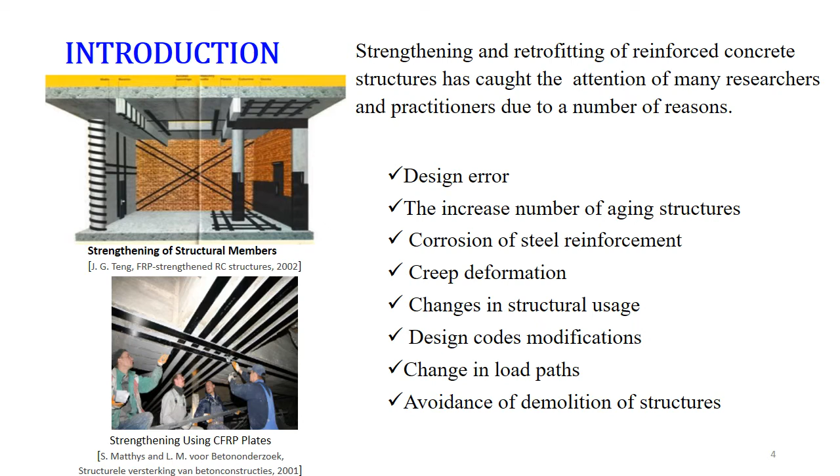Extensive research has been conducted in the last 3 decades to evaluate the performance of strengthening materials. Different strengthening techniques have been used to increase the axial, flexural, shear, and torsional strength and stiffness of structural members. One of the most widely used techniques is the use of steel and fiber reinforced polymer as externally bonded reinforcement. Steel kind of lost its popularity due to many reasons, because it is susceptible to corrosion and other shortcomings.

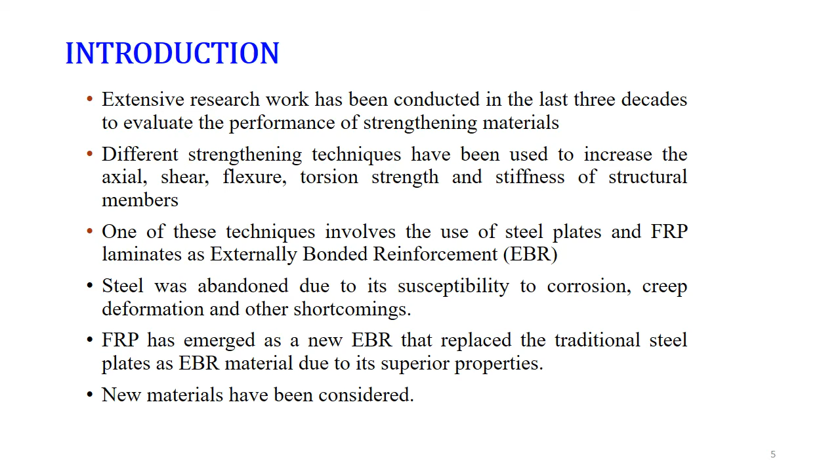FRP emerged as the most widely used external bonded reinforcement, due to many advantages it has, though it also has some few disadvantages.

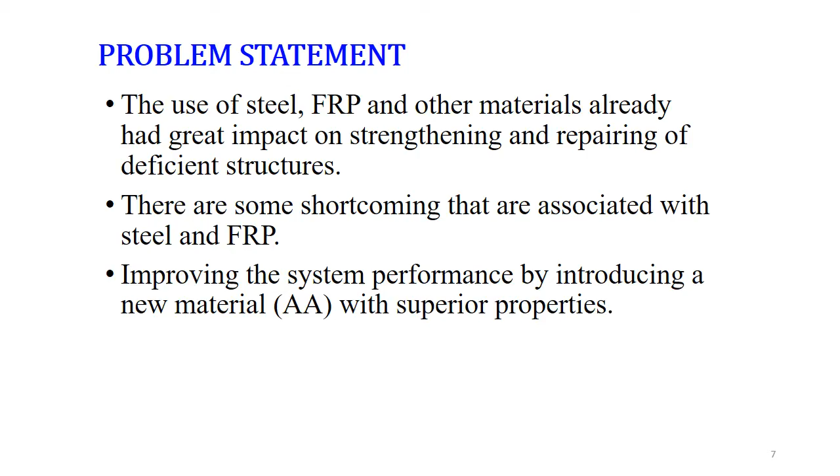Problem statement. The use of steel, FRP, and other materials already has a great impact on strengthening, repairing, and retrofitting of structures, though they have some shortcomings. What we are proposing here is using a new material, aluminum alloys, which has some advantages over the other two materials that have been used, steel and FRP.

If we look at steel, the disadvantages are susceptibility to corrosion and heavy weight. The advantage is it's ductile, and it has a lower cost. In between, it has flexibility and strength, but in the middle.

The CFRP, carbon fiber reinforced polymer: the advantage is that it doesn't corrode and it's lightweight. The disadvantage is that the failure is brittle, there is no ductility, it's a little bit costly, and it's inflexible, especially the plates. It's difficult to use plates in some situations, and one of its advantages is that it has high strength, higher than steel most of the time.

Aluminum, if you see, is greener. It has good resistance to corrosion, it's lightweight, has high ductility, and the cost could be just like steel or lower. It's easy to deform or form compared to steel or CFRP plates. Of course, the strength is not as high as steel or CFRP, but sometimes you don't utilize the full strength in the other cases.

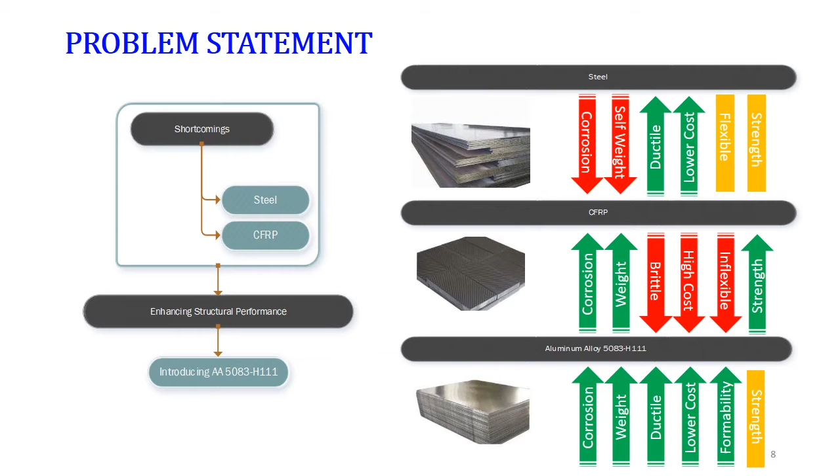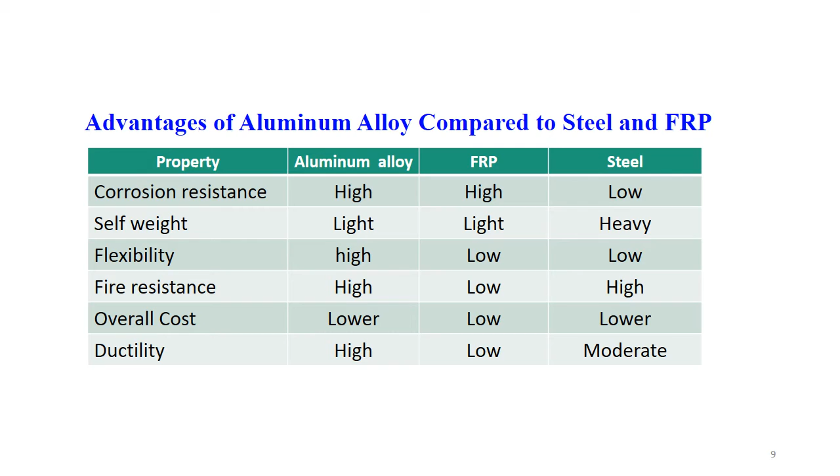This is summarized in this table, showing that aluminum alloy could have some advantages that overcome some of the disadvantages or shortcomings we have in the current materials for externally bonded reinforcement.

We explore the viability of using aluminum alloy plates as a newly externally bonded strengthening material. To do that, we need to assess the ultimate load and study the modes of failure between the aluminum alloy and concrete interface, and how they are affected by the aluminum alloy surfaces, treated or untreated, bonded length, and concrete strength.

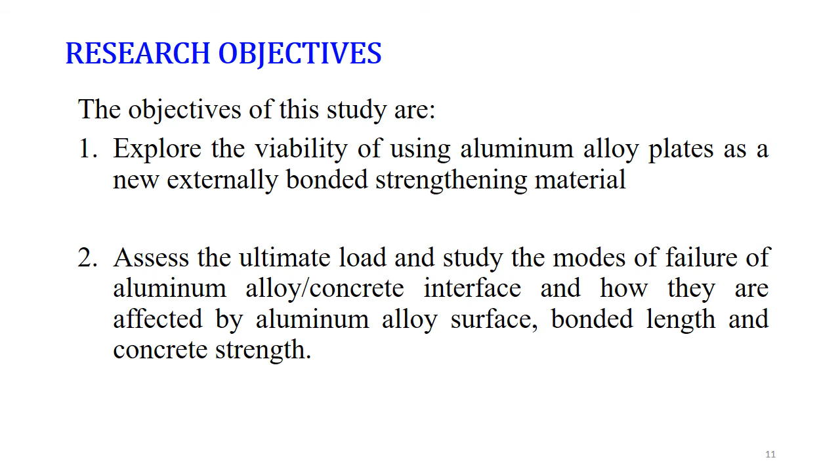Background and literature review: a structural member reinforced with external bonded reinforcement consists of the concrete material, the member, the adhesive, and the externally bonded reinforcement, whether steel, FRP, or aluminum in this case.

The external bonded reinforcement improves the original tensile strength provided by the steel bars, contributing to enhancing the strength and stiffness of the member. For this, there must be some shear transfer between the externally bonded material and the element to be strengthened, usually through an adhesive or epoxy layer in between. That shear strength between the two needs to be evaluated to ensure the effectiveness of the strengthening.

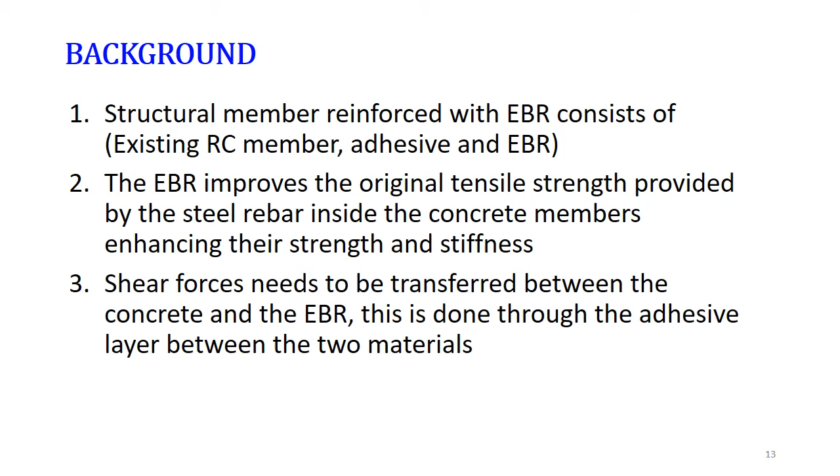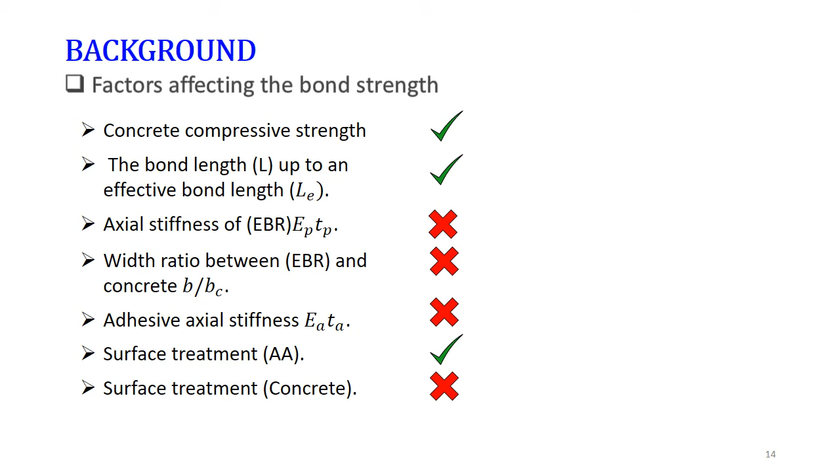There are many factors affecting the bond between the external bonded reinforcement and the element to be strengthened. We won't cover all of them, only those checked in green: the effect of concrete compressive strength, the effect of bonded length, and the effect of surface treatment on the bond between the aluminum and the concrete. Other factors exist but are not considered here.

In the experimental program, we have material properties, specimen details, instrumentation, and the test matrix. I'll go a little bit fast on this.

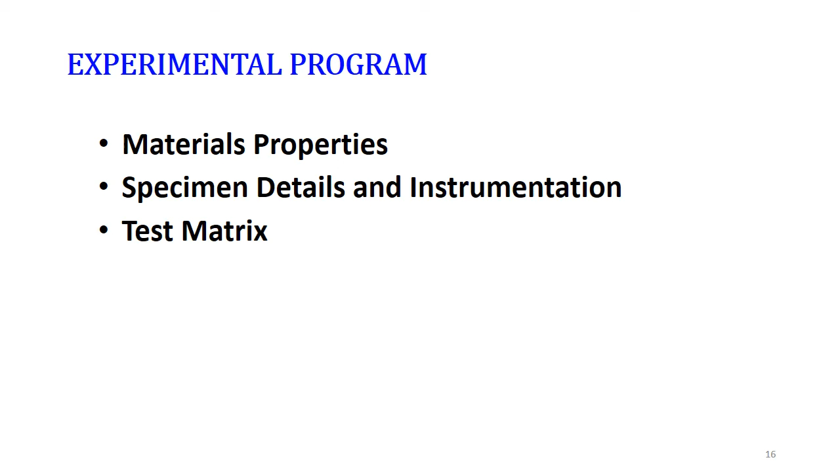We have different materials involved: the concrete, the aluminum alloys, the epoxy adhesive, and the strain gauges used to instrument the specimen and measure the strains. Of particular interest here is the aluminum alloy plate; we use specifically AA aluminum alloy 5083-H111, which has a tensile strength of around 300 megapascal and a modulus of elasticity of around 70 gigapascal.

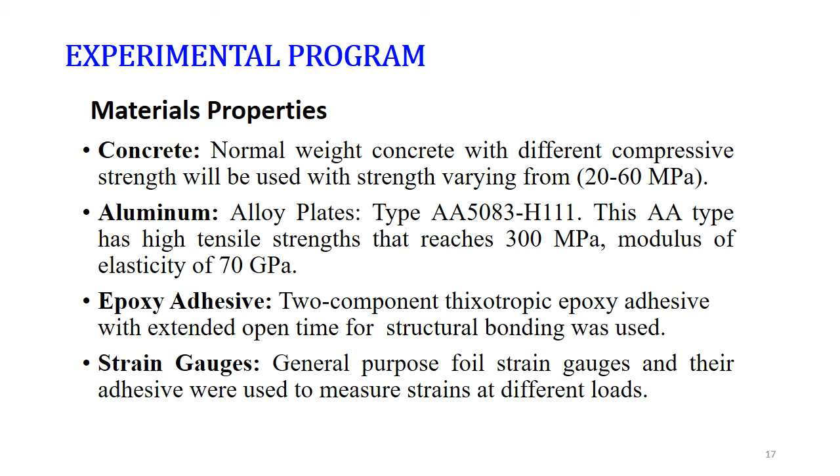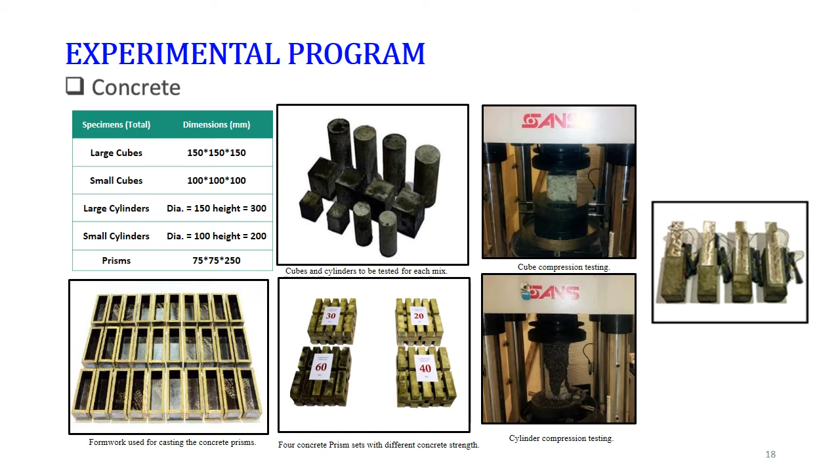We cast different samples: concrete cubes, cylinders, and prisms. Here is the mold used for the prisms, and here are the cylinders and cubes, large and small. Here is the testing setup for the cubes and cylinders, and here is a specimen ready to be tested using a direct shear test.

Specimen details and instrumentation: here are the dimensions of the specimen and the aluminum plates. The adhesive thickness ranges between these values, and here is a typical sketch of a prepared specimen.

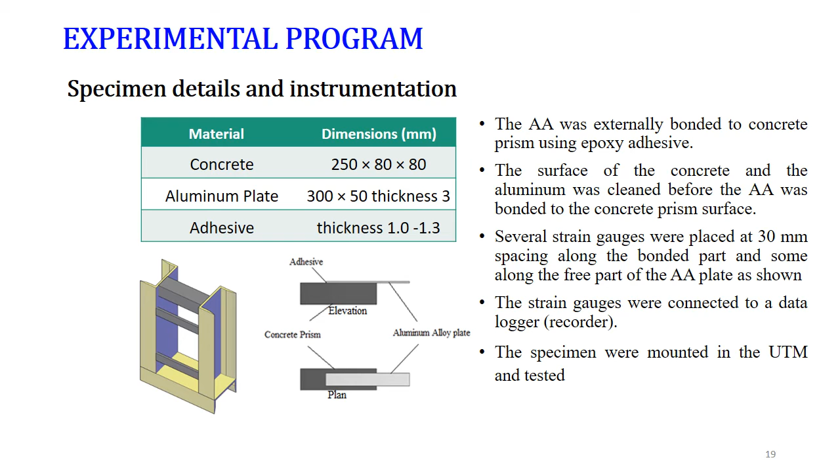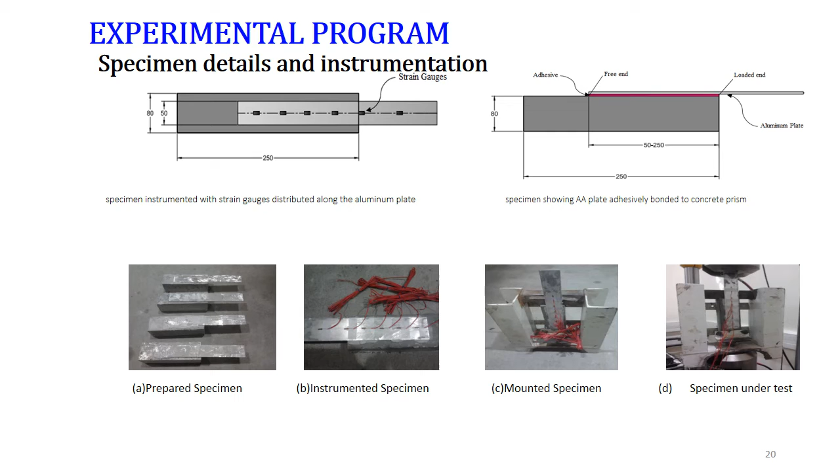The setup shown here is for holding the specimen for the direct test. Here you see the details of the specimen, its instrumentation, mounting into the rig for testing, and then placing the rig into the tensile machine to carry out the direct shear test.

This is the test matrix. Around 32 prisms were developed. The concrete strengths used are 20, 30, 40, and 60 megapascals, and the bonded lengths are 50, 100, 150, and 200 millimeters for each strength. We made 2 elements for each combination, giving the total number of elements tested.

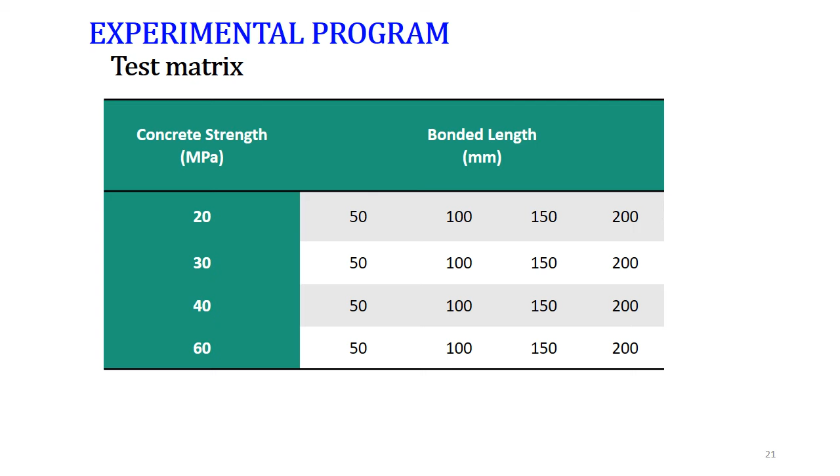We tested all specimens; here is a sample of the results. This is the typical result of one tested element with a concrete strength of 60 megapascal. P stands for plain aluminum, and L4 refers to bonded length number 4, which is the 200 millimeter length, the largest we have. The figure shows the different behaviors observed.

The first one on the top left shows the shear stress versus the distance from the loaded end, and you can see that the shear stress increases up till a certain length, and then starts to decrease. The second one shows the relationship between the slip and the distance from the loaded end, and the slip is maximum at this end, approaching 0 when approaching the other end.

Then you have the bond stress versus slip shown here, and then the strain versus distance, because we have strain gauges mounted on the system measuring the strain, and you can see the variation of the strains as we go from one point to the other.

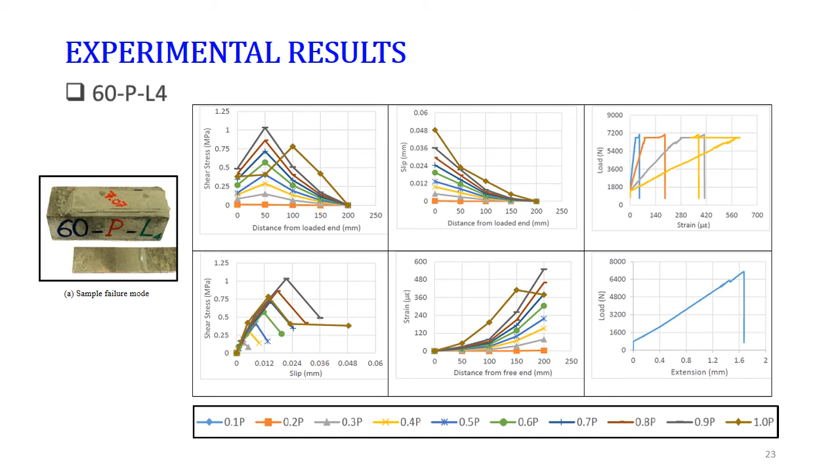The one in the top right shows the load-strain relationship: as the load is applied, what will be the corresponding strain in the 4 different strain gauges. The last one, in the bottom right corner, shows the load versus the extension of that particular member. This is for one element of 60 megapascal concrete strength, and the length is L4.

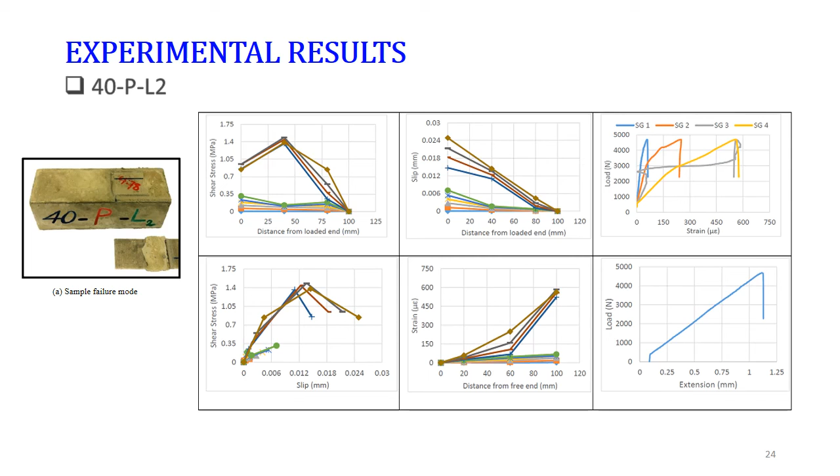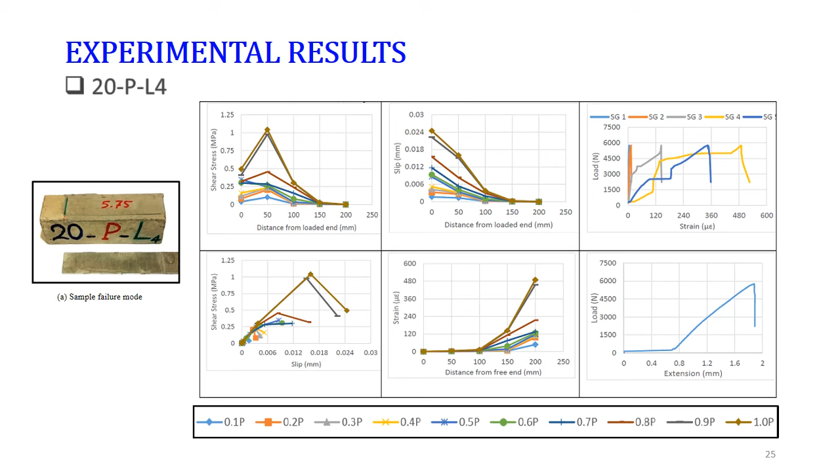There are different failure modes, but most of the elements, what we call plain plates without any surface treatment, fail very much by debonding. With the exception of a few, especially those with high strength concrete, which show not debonding but a little bit of delamination, though not much.

So debonding is the most dominant failure, which tells me that the aluminum surface as is isn't very good at providing high bond stress or shear stress between the aluminum and the element you need to strengthen. So something needs to be done about the surface.

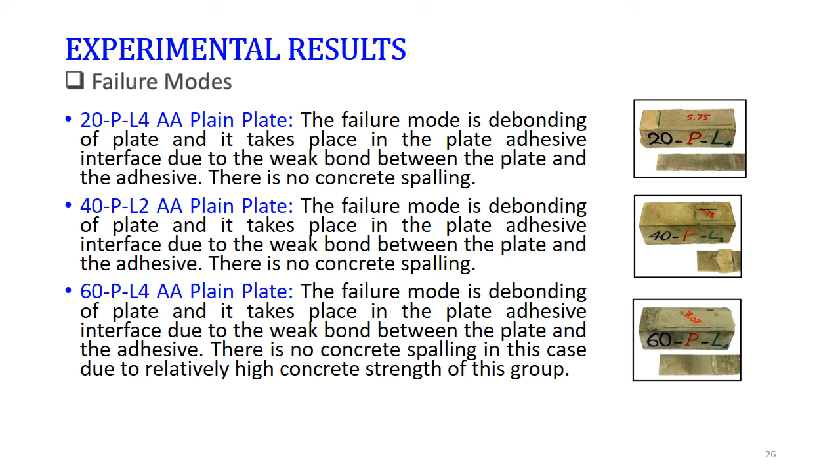Actually, we did other experiments in which the surface of the aluminum has been treated, and that shows a big difference in terms of the shear resistance after treating it.

Here I show some of the tests summarized — for example, the concrete strengths and bond lengths and their effect on the ultimate load. Sometimes you see a trend and sometimes it's not there, because debonding is a premature failure, so it doesn't always tell you the whole story, but some of it does show a pattern.

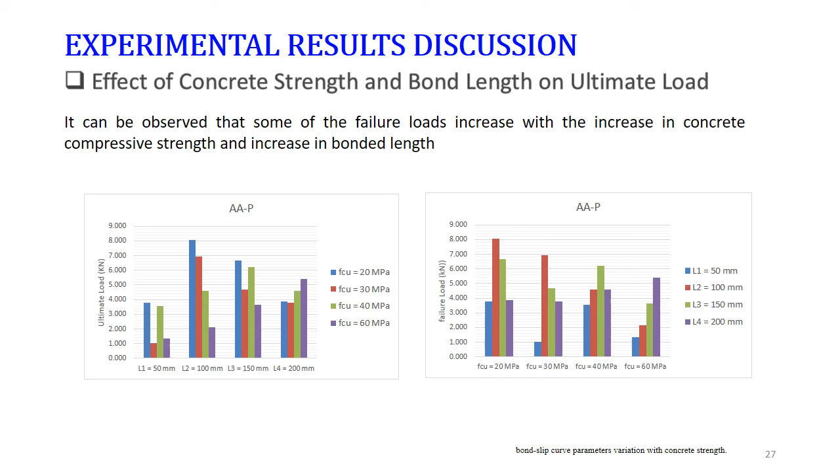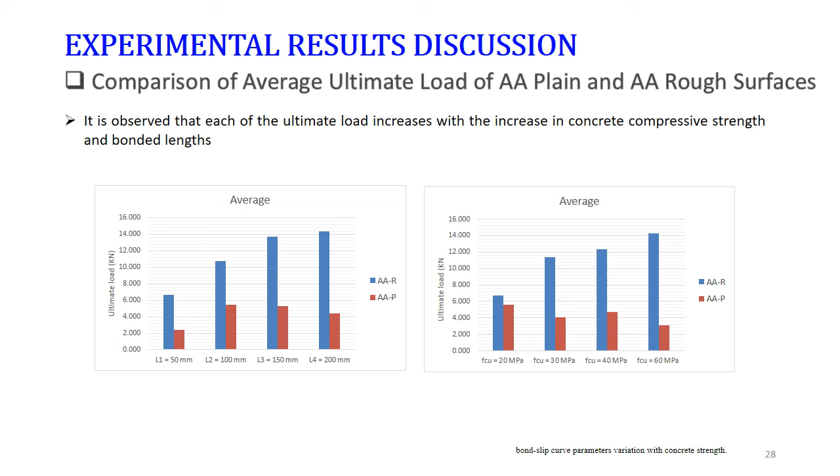Here is the summary comparing the ultimate load for the plain surface of the aluminum versus the surface that's been roughened, and you can see how much difference it made when the aluminum surface was treated — the blue ones here, where R stands for roughening the surface. The average strength and ultimate load change drastically, as you can see here.

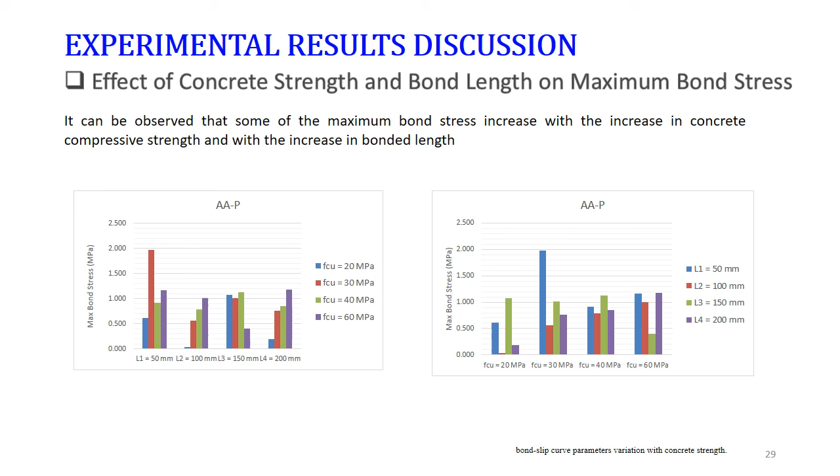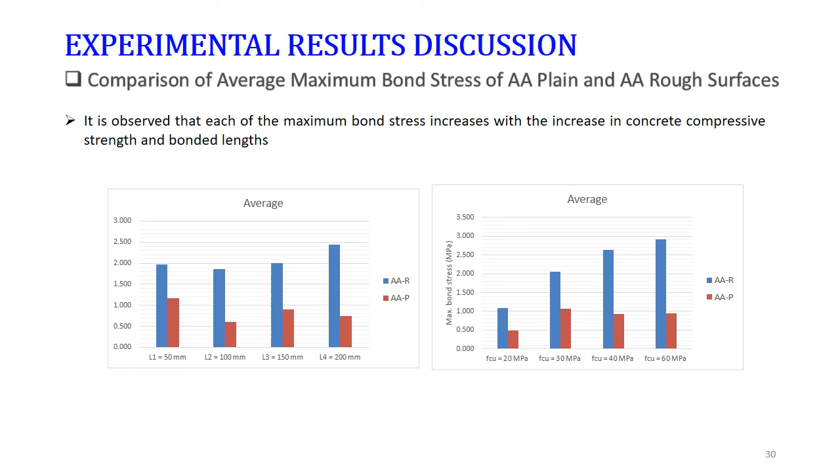This is for the maximum stress for the plain or untreated surface, compared with the maximum bond stress for the material when the surface is treated versus not treated. Obviously the difference is big between the red and the blue. So clearly, in order to use aluminum as an externally bonded material, you have to treat it.

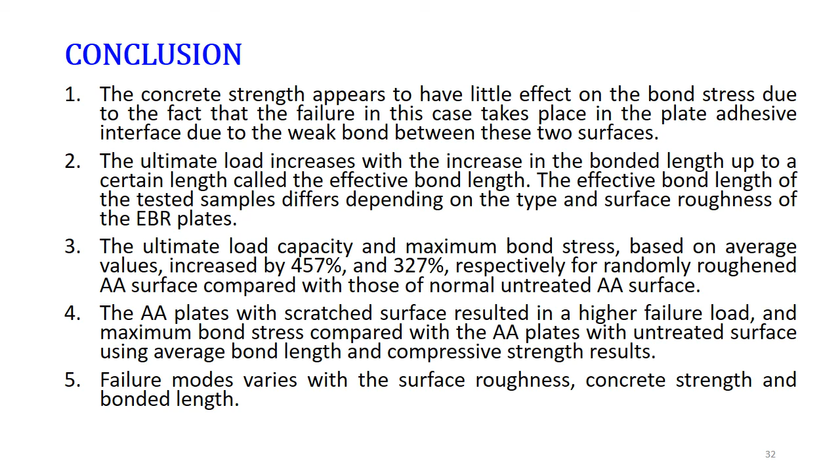Point number 3: the ultimate load capacity and the maximum bond stress, based on average values, increased by 457% and 327% respectively when comparing the treated surface to the untreated surface. So obviously that's the main conclusion: to use aluminum as an externally bonded material for strengthening any member, you have to treat the surface, and that will make a big difference in terms of resistance. Of course, the failure modes will also change if the surface changes.